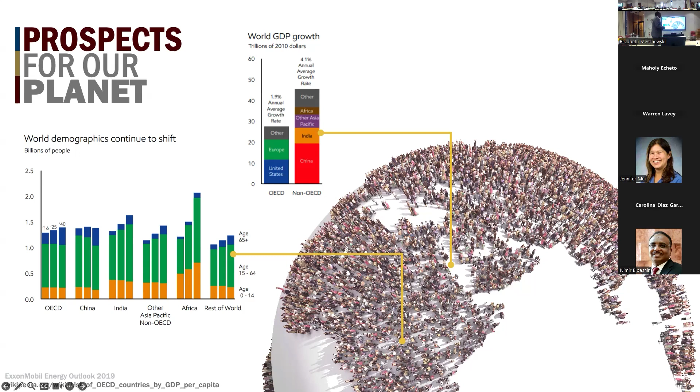The energy requirement of developing nations will be more significant than for developed nations. Therefore, we cannot claim we will survive with what we currently have from energy resources. The energy resources we have are quite limited, and fossil fuel still plays a very critical role in that energy mix.

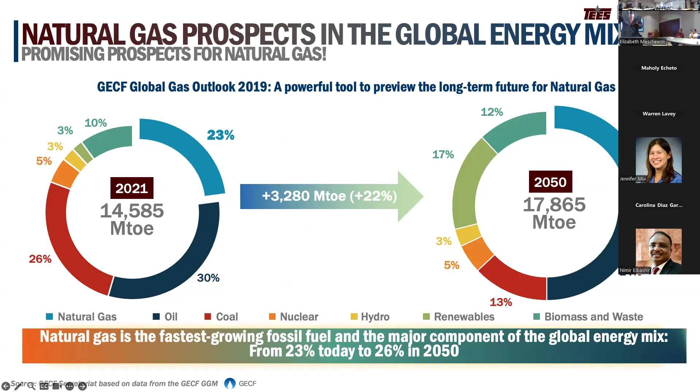All of this is a burden on us dealing with this decarbonization issue. Why is natural gas important? Because natural gas is relatively much cleaner than coal and oil, and at the same time, we've started to learn how to deal with it and how to handle it.

And by the way, starting from COP in Paris, there is general agreement that natural gas is the transition fuel from fossil fuel to the renewable sector of energy.

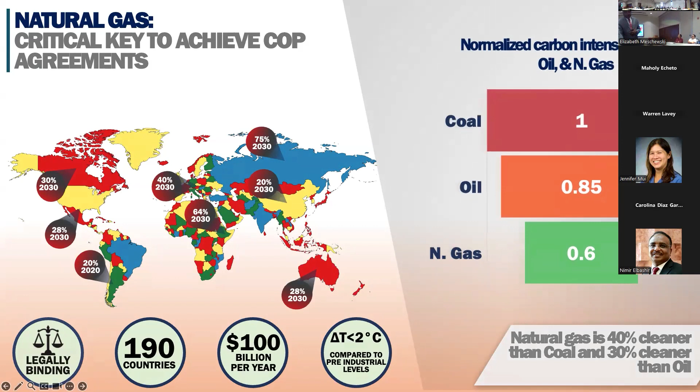So how can we do this? Even though we are seeing improvement in the reduction of emissions coming from coal and from oil, we are seeing to some extent an increase of emissions coming from natural gas, simply because we are using more of it. We are becoming more aware of the emissions coming from fossil fuel, but we need to do much more to handle the current situation. And that requires a major focus.

For the first time in the last COP meeting, which happened in the United Arab Emirates last year, there is such a statement: transition away from fossil fuels in the energy system in a just, orderly, and equitable manner, so that renewable energy sources will take over. But we have to guarantee this. Sadly, I got disconnected, so let's hope for the best.

So, this is where I participated in this conference, along with those from natural gas forum countries as well as different entities. The core focus is how we can do this—is this really achievable or not? Technically, they brought us as an expert working in the natural gas industry. Why is natural gas important? Because the countries controlling natural gas, both in production and in sending it to the world, are a limited number of countries, unlike oil.

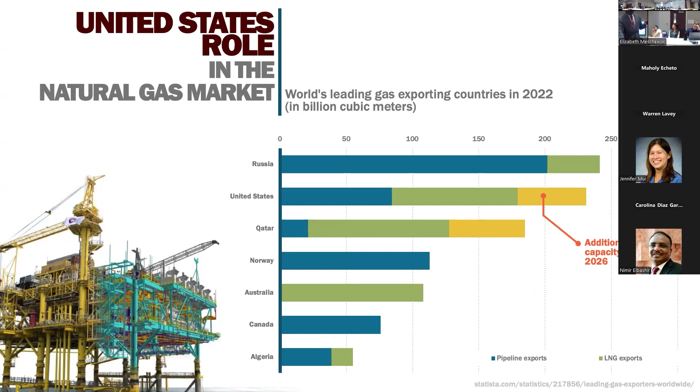You will see why this is important—this is very critical. I've been teaching a course for Texas A&M students since 2015 about natural gas globally and how it's really distributed. I keep telling them that the United States still consumes all of its natural gas internally. The shale gas boom changed the map completely, and now the United States has become a major player in LNG globally—from none in 2016, now they are leading the world.

They have the highest capacity, and by 2026 they are going to have the world's highest LNG capacity. This is where it exists—most of the new plants in terms of liquefaction of natural gas. What does that mean? It means a significant investment in something we call midstream natural gas.

Natural gas is composed of three elements: upstream, midstream, and downstream. Midstream wasn't very significant in the United States because most of the natural gas we have here is used in power generation—we don't need to clean the gas or do anything with it. So we do not have a midstream that produces a significant amount of components we have to deal with, specifically CO2, because now we're going to strip the CO2 and the sulfur so we can produce pure methane for LNG capacity. That's a big deal, and a big opportunity.

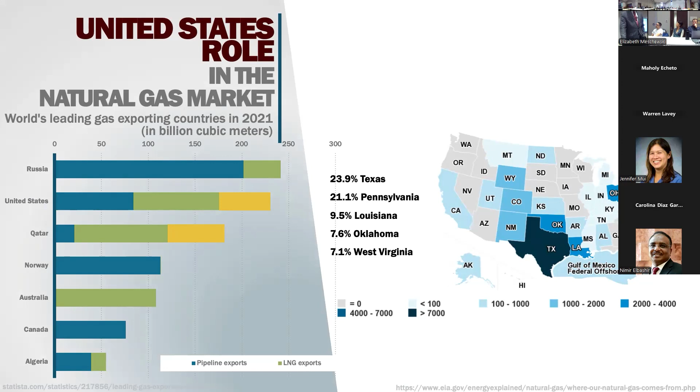The state of Texas is the leader in terms of natural gas capacity, followed by Pennsylvania and West Virginia in the Marcellus field, where the shale gas boom happened. But what does that mean? Now we have to figure out how to do this distribution properly. If we need to decarbonize, we cannot only decarbonize one sector—we cannot say we'll wait until we use that natural gas and decarbonize it then. We have to decarbonize it from the well all the way up to the wheel, ensuring all of those sectors are decarbonized so we can manage this situation.

And that's not an easy deal, by the way. So the transformation to hydrogen becomes the story, becomes the core focus. Natural gas is still the source of 70% or more of United States hydrogen. Steam reforming of methane is still the major source, even though now we are pushing heavily towards green hydrogen. The hydrogen industry is also quite complicated and has to be well integrated from the source all the way up to the utilization sequence of the hydrogen. That's also another opportunity we have to think about, how we integrate all of those together to ensure the decarbonization, even for the green sources, is not an easy target.

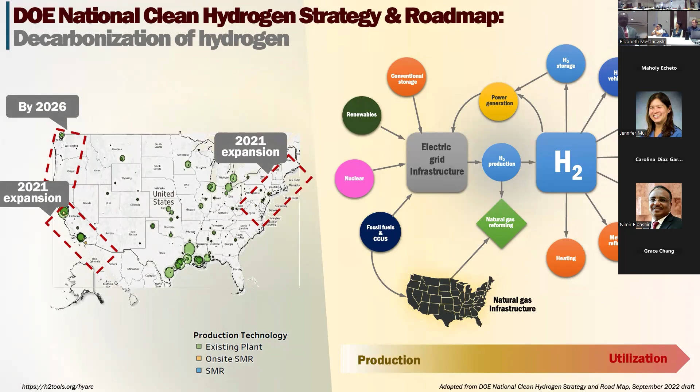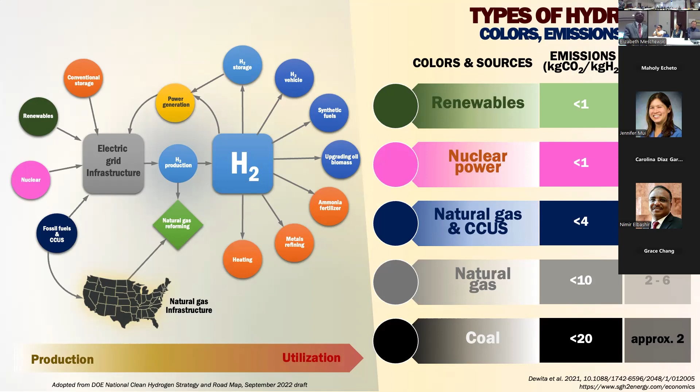So the United States, sadly, is number 2 in terms of the CO2 emitter after China. We all know that. So there is a huge investment from the Department of Energy, and you are very successful in establishing it in order to handle this situation, and this also helps the transformation to hydrogen.

After exactly the shale gas booming, Texas A&M decided to build the Gas and Fuel Research Center. Texas A&M, we were the leader in the area of oil, and our petroleum engineering department is very well known - that's our strength area. Then when the shale gas and shale oil boom came, Texas A&M thought of how we could really capitalize. Meanwhile, we look at the problem from the source until the end of it.

I had the pleasure from 2015, the Board of Regents of Texas A&M built that center and I became the lead of the center, which operates both on our main campus in College Station as well as in Qatar. At that time in Qatar, we built a very unique collaboration model with the industry that also exists in the state of Texas, working in natural gas processing. So we have petroleum engineers, chemical engineers, mechanical engineers, safety, material, chemists - we are a combination of multidisciplinary working to advance natural gas production and processing.

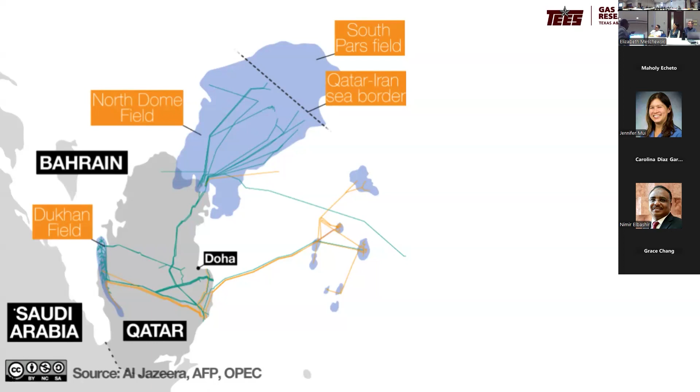This is the state of Qatar. The shaded area outside is non-associated natural gas, which is the same size as Qatar itself. It's not associated - this is the reservoir that Qatar now depends on, and it has become the number 1 leader almost in LNG capacity right now. And also in pipeline infrastructure - you can see the pipeline going to the United Arab Emirates from the overall structure. So Qatar is a peninsula connected only to Saudi Arabia by land.

Okay, so now how do they utilize, how do they monetize their natural gas. They have done it in a form - when I teach my class, I tell them there are 3 properties of natural gas monetization. Property 1, use it locally, like the United States. Property 2, you transport it globally - you have 2 means: pipeline, like Russia with all the network to Europe, or through LNG. With LNG, you make it liquid, reduce it by 1/600 its original volume, and ship it. When you get there, you turn it back to gas. And then the hydrogen. So they have done the 3, but not the hydrogen. In the United States, we have hydrogen as part of the game.

So how do we deal with this problem of decarbonizing the natural gas industry so that the hydrogen will be a hydrogen that's suitable and comparable to green hydrogen.

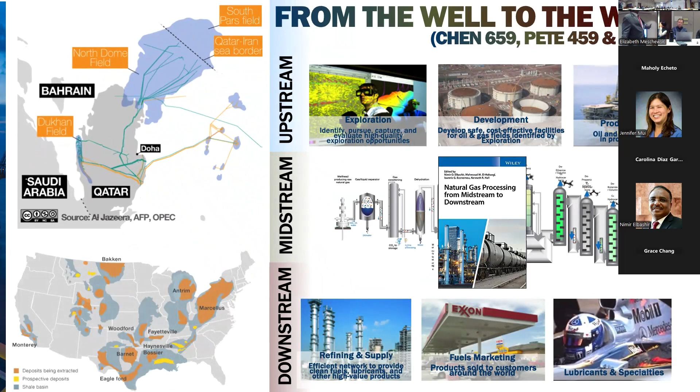And that's the question. So that midstream plant, which wasn't existing in the United States until recently, became the issue. And this is the core focus area of my research team. As a center, we work with the industry, we work with academia.

Now we are coming to a very distinguished center here, exploring opportunities of collaboration. We collaborate globally, by the way, and we work with industry, whether they are existing in Qatar or in Texas or even global-wide. And then we are trying to make an impact in terms of technology development and processes. This is a sample of some of the companies that we are working on. The funding that's come to us is coming from different resources, and this is part of it.

Let us come to the technical talk of the story, the CO2. So the CO2 is our nature. It is existing there, and the nature knows how to deal with it. The nature is handling around 750 gigaton per annum of that CO2, similar to the air, similar to whatever we have around us.

Nevertheless, our utilization of these fossil fuel resources brought this 37 gigaton per annum of CO2, which becomes the whole burden of the global warming, even though it's very small compared to the one that the nature deals with. So now we are struggling to figure out how we capture it, which is the core focus of your team, and for us, how to utilize it, how we put it in the map.

And if we look at the comparison between the two, we will find the following. That's the CO2. We have several options to deal with it. We either eliminate it by trying to find 100% renewable sources that we can deal with, or we will need it, then we have to figure out how to recycle, reuse, to some extent store this amount of material that's composed of the greenhouse gas emissions. And that's the real issue.

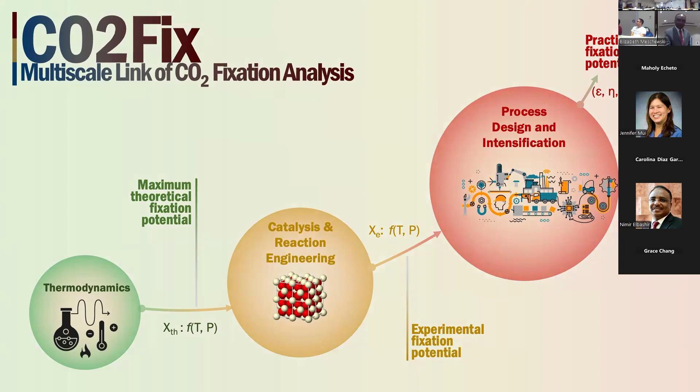So trying to measure this is very sophisticated work, and I have my PhD student who is currently at MIT Energy Initiative, Gasin, who conducted this type of development and assessment, done in collaboration with MIT Energy Initiative. The techniques that he has done are the following: we need to understand the chemistry, and we need to understand the energy requirement in order to do the conversion of the CO2 in the process.

And then we need to understand how we will handle it as the process goes, and finally whether it makes sense economically or not. So it will hit two dimensions in terms of the process. I will very briefly describe it to you.

So if we have a very simple chemical reaction, utilizing CO2 with methanol in order to make carbonates, DMC, whether this chemistry could be considered CO2 utilization or not, that's the question.

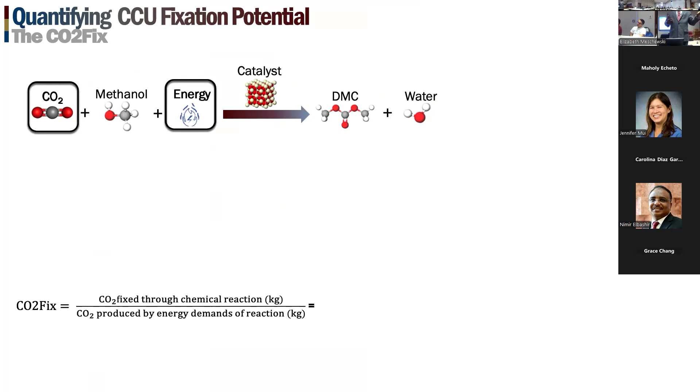So what we're going to do is first define a CO2Fix parameter that we develop. It is actually the CO2 fixed through that chemistry divided by the CO2 produced by the energy requirement during the process. If it is 1, that's total fixation of the CO2, but if it's less than 1 or more than 1, that's the story.

So we're going to look at the chemistry, see how much heat is required for the chemistry, how much conversion we'll be able to achieve, and how much energy is required for this process.

This energy will be coming from the reaction, coming from the heating, and coming from the compression of the process, because those are gases. Then I will account for all of those relevant to the conversion I could achieve in one reaction. And when I look at it, I will get to know exactly whether I am really fixing the CO2 or not.

But we added other parameters to the process. So what are those parameters that we added? We are trying to understand the extent of the energy integration - could we reduce the energy requirement through energy integration or not?

And then whether the efficiency of the process in terms of the energy source could really impact this CO2 fixation or not, and also the energy intensity of the overall process. So we inserted all of those parameters.

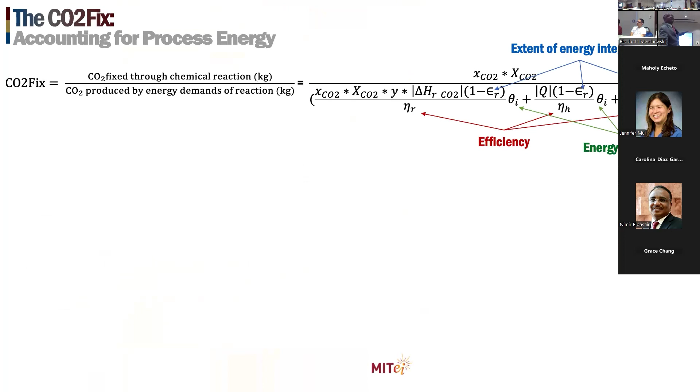And when you see the source of energy, it can show you exactly the diversity. So if I do this chemistry using coal, the story is completely different if I'm doing it using wind. And even wind offshore is different from wind onshore, and so on.

So where you get the energy from is a very critical element of telling you whether you really can save this or not - that the process at the end we develop, in terms of the efficiency and the intensity of the reaction, that could tell us.

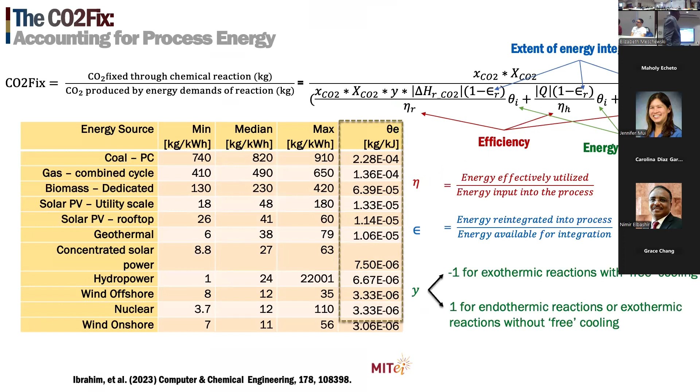And that, as I told you, has been done in collaboration with MIT Energy Initiative. In a typical process, you look for several chemistries, you look for different sources of energy. You show here that all of those based on fossil fuel, you may barely get to fixation if you're so lucky, even if you're using CO2, because you are in this region.

But all of those with renewable, you can get to even higher fixation. So it's an encouragement that even if we want to take CO2 utilization, it's better to take it with renewable energy. And this is quantitative.

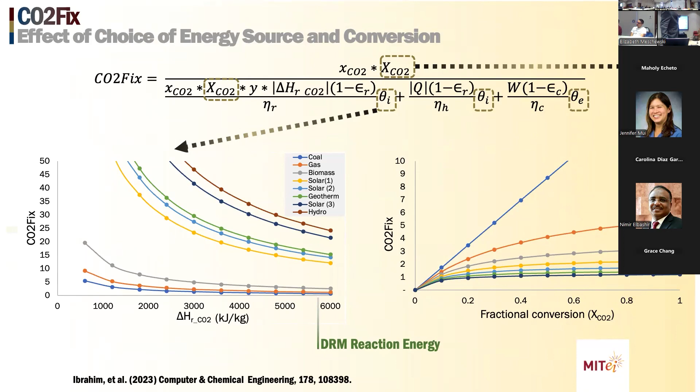And when you look at a conversion like the chemistry of dry reforming of methane - I'll speak about it in the remainder of my talk - this will show you exactly how we could make a difference in the process.

So the process will have two elements: experimental, to understand how the process works, and developing the modeling side in order to account for the potential CO2 fixation of those processes.

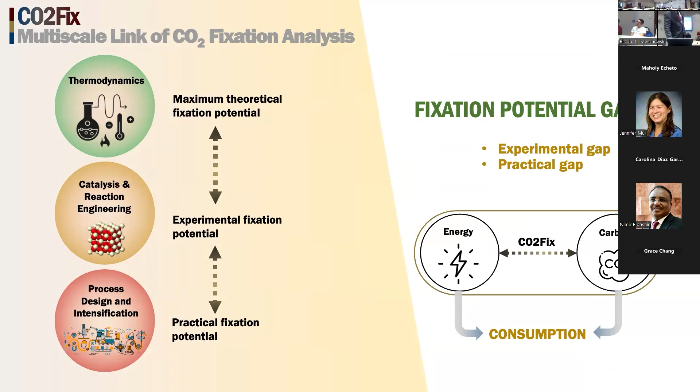So let me take you to one example with natural gas. And that's not a common example, but it will show you exactly how we use our know-how in those areas.

We work in gas processing research in an area called gas-to-liquid technology. In the gas-to-liquid technology, we take natural gas and make liquid hydrocarbons out of it. This is a competing monetization technology with liquefied natural gas, which physically makes the gas, which is methane, into liquid by cooling - mechanical engineers' brilliance. We chemical engineers make gas-to-liquid technology.

We take the gas, we make it syn-crude, similar to crude oil. I guess similar to the area that you're working in. So you're going to see some similarity here.

So this process is composed of 3 stages. The first one, reforming - how we reform natural gas to make something we call syngas, hydrogen and carbon monoxide. This reforming is the same process that makes hydrogen, which is steam reforming, but it could be other reforming.

We take it to a chemistry called Fischer-Tropsch, developed by German scientists in the 1920s, and we produce syn-crude. This syn-crude is white compared to crude oil but has the same hydrocarbons. We refine it and produce a final product.

If we look at the flow chart of the process, this is how it looks. It's composed of three elements.

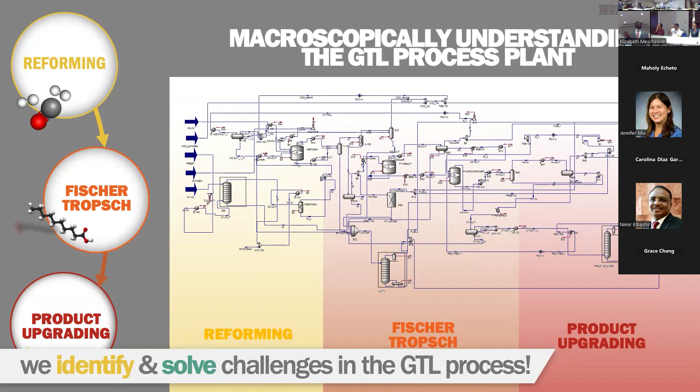So how can we deal with this process? My research team works on three pillars, and that's where we learn how to decarbonize the process. This decarbonization is very critical because the future refinery globally will be key. The reforming, refining plants and chemicals industry built on crude oil will not exist by 2050 - it has to be transformed to biomass as a feedstock, or to CO2 as a feedstock, or other waste.

I guess you are working in all of them - you have a very strong contribution. That's what I followed today and enjoyed listening to, the biomass work and how you process it to fuel. You're also working on plastic waste and how it goes through pyrolysis, and then capturing the CO2. So this is the complementary part of how you build that network that will transform the industry.

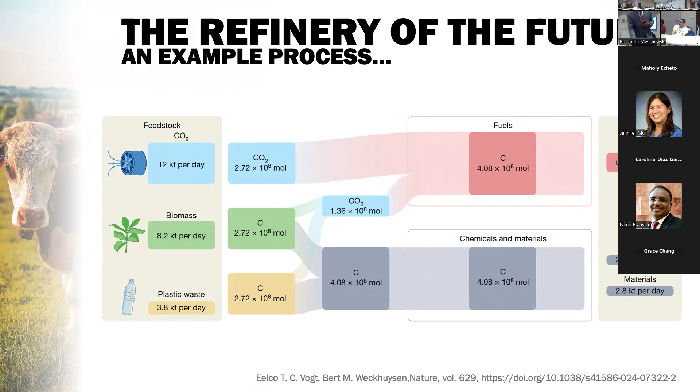This is the Nature paper, actually from a group in the UK. The Department of Energy considered it the starting point for any work to design the future refinery plant - it has to start from here. They were not going to accept anything that takes crude oil or gas. Here we are trying to see how we could really be relevant and meet all those standards that will be part of this story.

You can see that different refineries will take different products, and I'll tell you the story from the end - the fuels that we make. I'll show you exactly how we work in this area. The final fuels are an interesting project - we worked with Shell, Rolls-Royce, and Airbus to design synthetic paraffinic kerosene coming from natural gas through gas-to-liquid technology, to replace crude oil derived kerosene or jet A1. This was a very interesting consortium.

I have the fuel characterization lab, and my research team works heavily on a unique set of characterizations to understand all the properties associated with fuel design, and how different fuels and fuel blends relate to hydrocarbon structure. Certification of each fuel requires certain properties - when you meet those properties, ASTM will tell you if you can call your fuel aviation fuel, or diesel fuel, or not. We work very closely with industry and have an ISO certified lab. That means industry uses us, and I get a lot of funding from it. That's how I hire a lot of students to work with me, and it helps in many of the operations. I'll show you a unique example from the aviation industry.

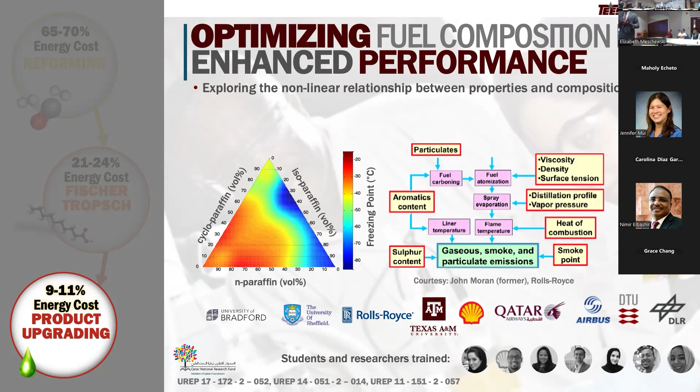Meeting all of the properties is a big deal for those types of fuels, and that's an interesting area we work heavily on. We also work heavily with GE and others, and besides Shell, in aviation fuel and diesel fuel.

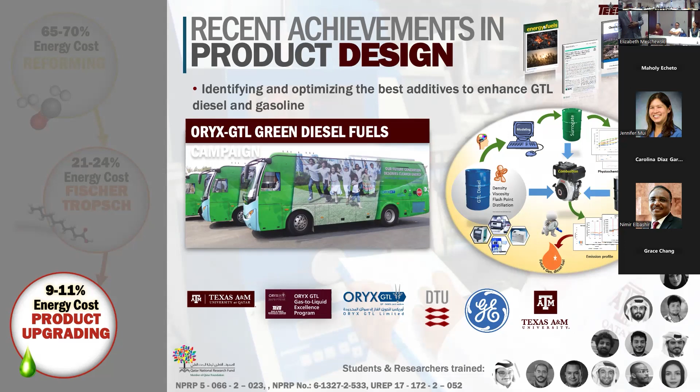Understanding those types of fuels and trying to insert them into the industry and certify them is a very big deal. The consortium with Qatar Airways allows us to support Shell and others in order to certify something we call ASTM D7566. That means a mix between jet fuel coming from crude oil and fuel coming from GTL, SPK, 50/50, that can be used in the airplane. The certification of fuel in the aviation industry is very complicated, unlike our cars — because with cars, we can stop and take an Uber, right? But in an airplane, if you have a problem, it's going to be a big deal for the certification of the fuel.

We also work heavily on catalysis in order to understand how those processes work. We design our own reactor systems and scale them up, starting from lab scale, going to bench scale for many of them — that's a typical bench scale for the Fischer-Tropsch process.

For the Fischer-Tropsch process, we work with Cambridge, with Open University, with Virginia Commonwealth, but we also work heavily with industry to help them see how they can control the selectivity of the products coming out of this reaction. This is a polymerization reaction — you start with a building block, another one comes, and so on. But if you're only interested in gasoline, what are you going to get, and how can you control the process?

We've done a lot of hefty work designing those catalytic processes, and we advance them — particularly the one related to CO2, the most energy-intensive process I referred to, which is reforming. This happens at 1000 degrees Celsius and above. In Shell's plant in Qatar, the Pearl GTL plant, it's 1300 degrees Celsius where they do the reforming process — see how intensive that is?

So we told them we can advance a reaction called dry reforming of methane. Rather than reforming by steam or reforming by oxygen, partial oxidation, we will help you commercialize reforming by CO2. Good deal? That's what we promised them.

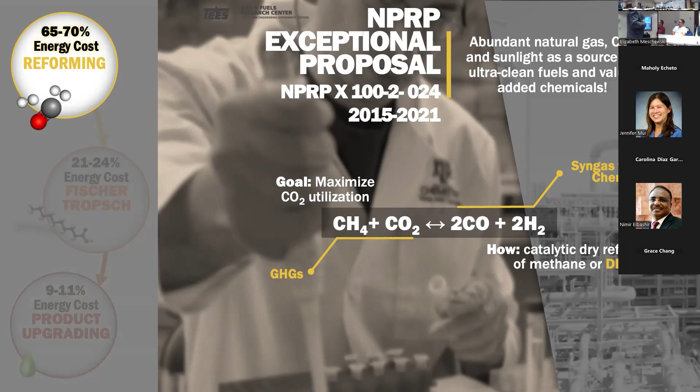Then we need to prove that this process is a CO2 fixation process — otherwise it has no meaning, and it's just energy. This process is actually very unique. It has existed for a long while, but no one was able to commercialize it, unlike other reforming processes.

So I led this consortium for 6 years. It's around a $6 million consortium, $5 million coming from the Qatar National Research Fund, besides $1 million coming from different sources, with Total Energies, Total Belgium in Feluy where the petrochemicals are, as well as Total Qatar, and then with Northwestern University. There, we worked with the chemistry department — Professor Tobin Marks, Peter Stair, and Eric Weitz.

And with my colleagues on the systems engineering side, we tried to solve the problem related to dry reforming. The problem is as follows.

For the reforming, we have two core carbon sources, CO2 and methane. Carbon deposition is very likely. The reaction is even more endothermic than steam reforming of methane, meaning we're going to need more energy. And if I get this energy from burning fossil fuel, I will never get to CO2 fixation. The very bad thing is that I'm going to have a deficiency in hydrogen — the hydrogen to carbon monoxide ratio, the best I could theoretically achieve is 1:1, while in the downstream process, the least I need is 2:1. That means I need to solve this.

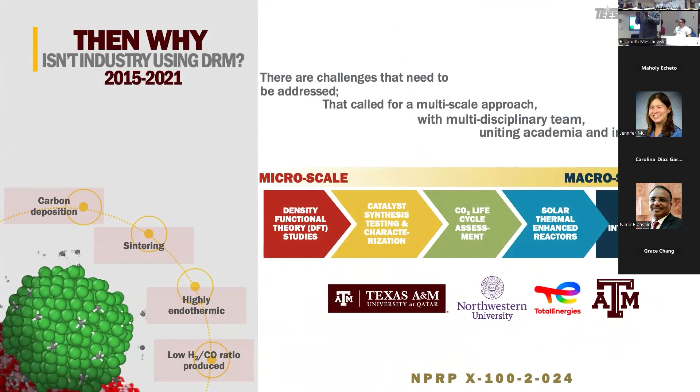So what we promised them is that we would solve all of those problems, addressing those issues from the micro scale all the way up to the macro scale. We go to the core of the chemistry, look at the process, and integrate all of it together. And we came up with solutions at the end of those 6 years — solutions that address the problems we started with.

With Northwestern University, they worked on designing a very unique catalytic process protected by atomic layer deposition, building a layer of amorphous alumina on the active site so that it's not contaminated by coke, which would kill it. My research team designed a system of nickel cobalt catalysts. The most important part is how the reactors work, so we designed a series of novel reactor processes.

Those novel reactor processes will then help to address the remaining problems, the endothermicity and even the deficiency of the hydrogen and carbon monoxide ratio. I will focus for the sake of time on only one of them.

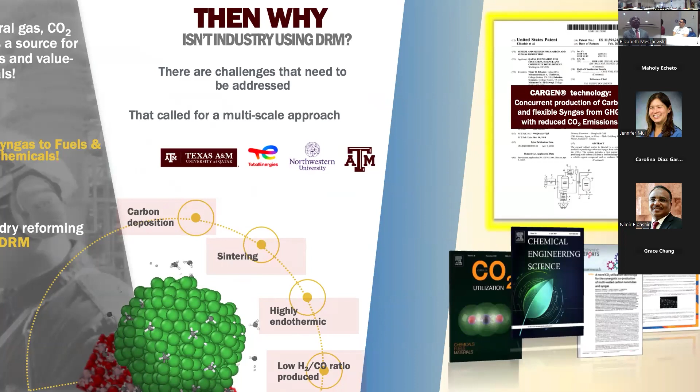This has been a very successful consortium. We have more than 30 journal papers, more than 6 PhD students graduated, 20 masters, and so on from different universities and institutions. The uniqueness of the patented technology for the CARGEN is the most important element. This is a model where students have an exposure of going to Evanston, fellowing in Belgium, working and getting that type of exposure of collaboration in big groups. It has been a very unique type of work done in an integrated way.

This CARGEN process, or carbon generator reactor, is a collaboration we started right now with a DOE proposal. We hope it will be successful and will take us to move forward. Let me explain it to you.

The process started with an idea from this student, who later was my PhD student. I just a couple of days ago had lunch with him in Chicago. He is now in Honeywell.

And this guy came up with this brilliant idea. In the project, we are trying to avoid carbon formation, which is one of the major killers of the catalyst. He said, let us make carbon in one reactor and make the reforming in the second reactor. It was just whatever idea, and what we end up with is a technology of 2 reactors.

The energy requirement of it is almost half the energy requirement of the dry reforming of methane, close to what we want. The CO2 conversion, because of those 2 setups, can go above, well above 65%. Then we will never be limited by the 1:1 ratio. We can go in the second reactor to whatever hydrogen to carbon monoxide ratio.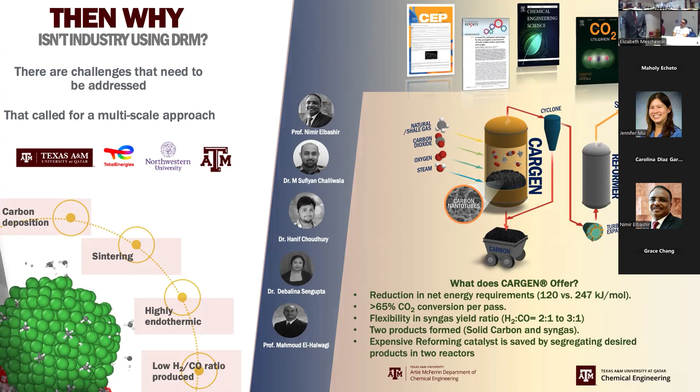So this CARGEN technology - I will show you exactly how it developed from the inception until the scalability level of this technology in terms of a process.

The concept again came from this student, and I asked him with my colleague, Professor El-Halwagi, in process systems engineering, to do thermodynamic calculations to see exactly what the energy requirement is for this process. At the lowest energy, we formulate the most amount of carbon. Therefore, in dry reforming, we do it at a very high temperature to avoid carbon formation. So we go in this range where there is no carbon formation, and the catalyst can survive.

But in this range, we burn a lot of fuel, and the CO2 emission is the highest. So we pay one cost for another cost. So he did it at the autothermal point almost, and produced the most carbon.

Then we came and said, let us do it experimentally, let us go and see whether this is really real and what type of carbon. We never intended to produce carbon nanotube - this was not the intention. The intention was to get whatever carbon material and get rid of it as a solid carbon.

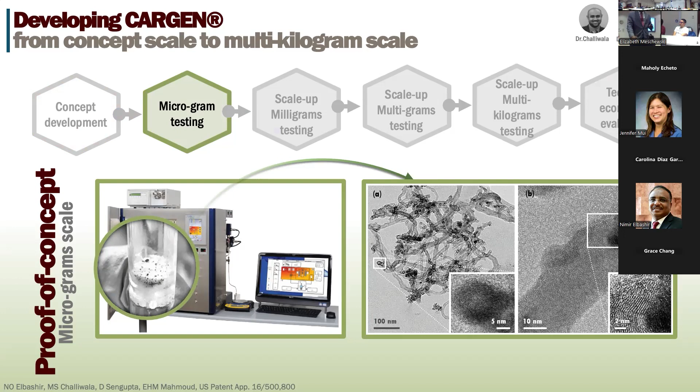So what we noticed when we did it at the micro level, in my small type of reactor, was that the carbon was multi-wall carbon nanotube, at the microgram level. Then we started getting curious - is that real or is there something wrong? Then I asked them to scale up the reactor and scale up the process.

So Dr. Sufyan and Dr. Hanif, who's a postdoc working in my team as well, moved now to the TGA. In the TGA process, they did it at the milligram level. We found that we can still control it to form multi-wall carbon nanotube, and it's a tip growth mechanism where the catalysts behave like this in the process.

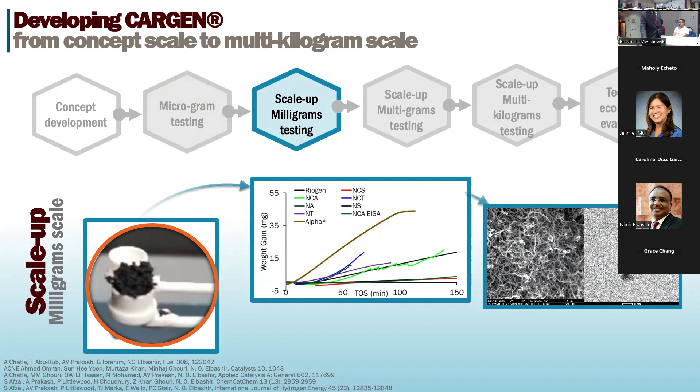Then we changed our strategy in the catalyst. At the beginning of the project, we were trying to use catalysts to avoid carbon formation, but now we are aiming towards carbon. So we have to switch the strategy to make catalysts that produce the most carbon in the process - and that's also part of the discovery of the process. Now we proved it in the milligram scale, so we said let us see it in grams and hundreds of grams.

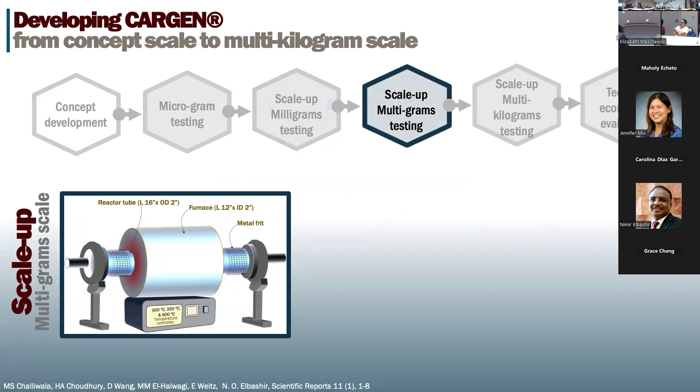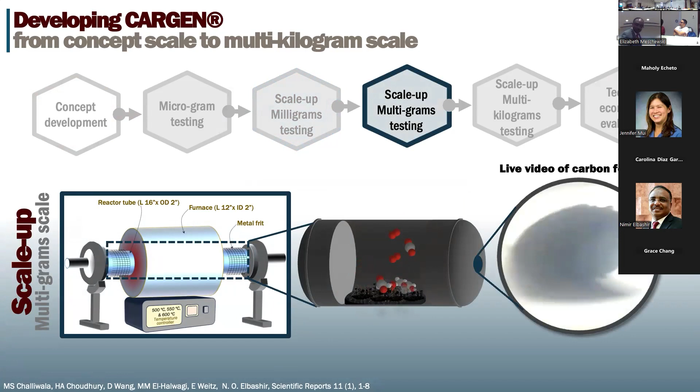Then they design a chemical vapor deposition system, which is a different regime of interaction, and we run the reaction. If you see, the process will accumulate the catalyst, and then we will make carbon nanotube out of this process. It will be very clear over here.

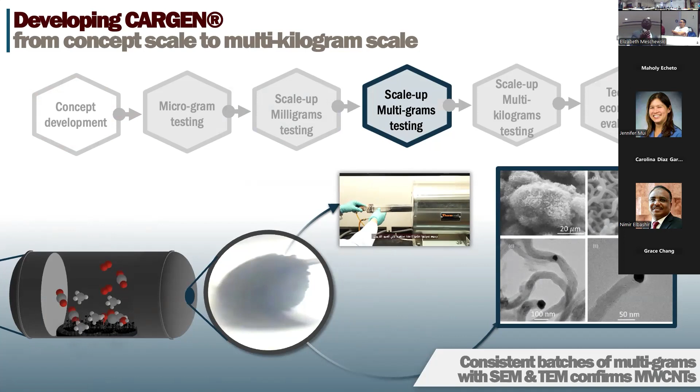And if you look over here, you're going to see Dr. Hanif pulling out this tube full of carbon, which started with the catalyst and carbon nanotube, and it's still multi-wall carbon nanotube. Then we start playing with the protocol on how to ensure the quality of the carbon nanotube, depending on the protocol of the process.

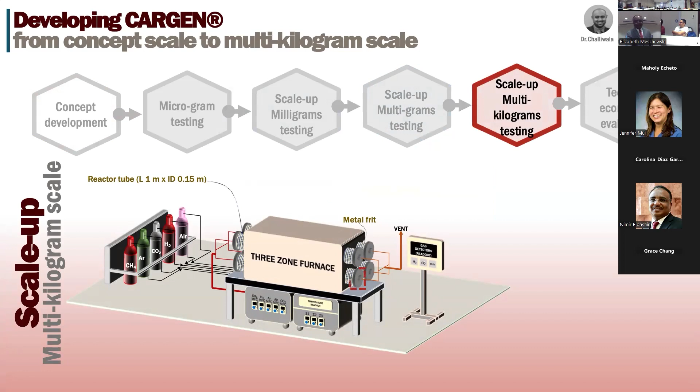So we started looking at whether we can make it at kilogram level, which is what we observe at the microgram level. So at the kilogram level, we design a larger system of a similar process, and that's carbon nanotube in terms of kilograms inside those tubes.

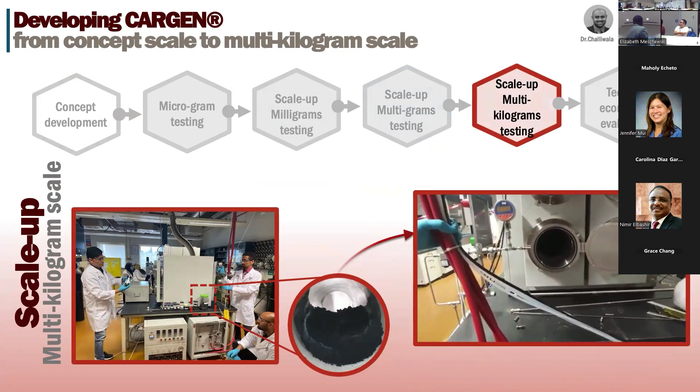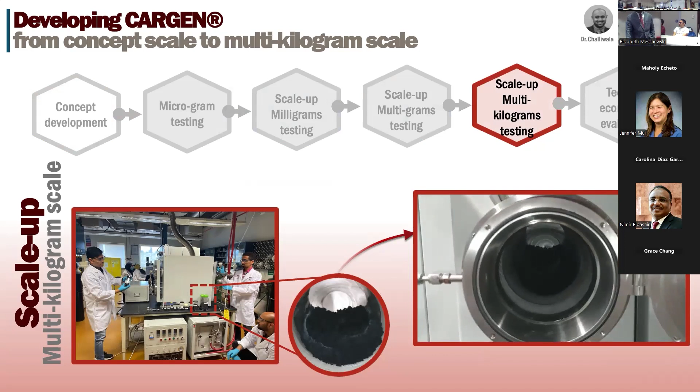So when you look at it, actually this is a scientist, the postdoc and the PhD student, pulling the tubes out, and this is full of carbon nanotube. That's a kilogram-level demonstration of the process in the chemical vapor deposition process, and still it's a multi-wall carbon nanotube of high quality, not from us. All the third parties who want to collaborate with us took it.

So what does that mean? Let me take you back again to the decarbonization story and to the natural gas process itself. This means the following: for example, in Qatar, and I was talking to Kevin earlier, they have a very unique structure of infrastructure. Most of the gas processing plants are in an industrial city.

And the midstream, because they are producing LNG and GTL, they have to strip everything down until the methane. The midstream is the largest existing. They have so many trains in one place. Per day, roughly, they can emit 10,000 tons of CO2, and semi-pure CO2, because this came from the sweetening process. In the sweetening process, they have sour gas, and we remove sulfur and we remove the CO2.

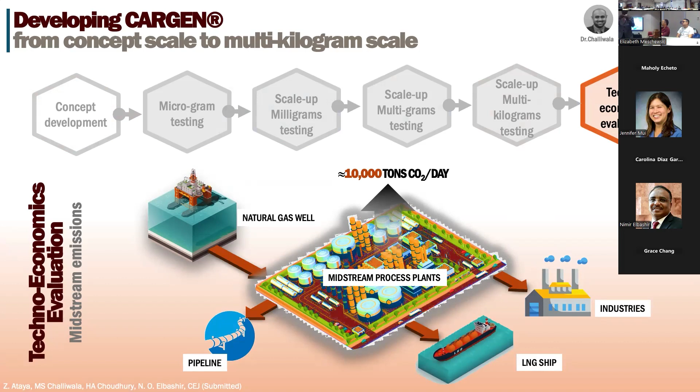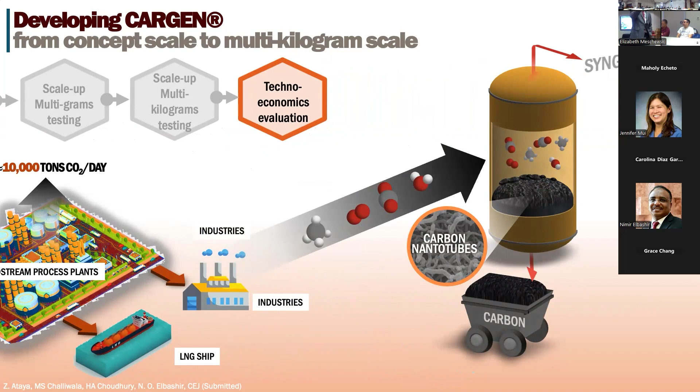So here, how could we really, by similar technology like this one, bring the midstream plant to the downstream side of the story? This CO2, which impacts the carbon intensity of whatever product they sell, we can take it now and bring it to the downstream side to produce two things: syngas and carbon nanotube. And it will be a full sequestration of the CO2 if we do it properly.

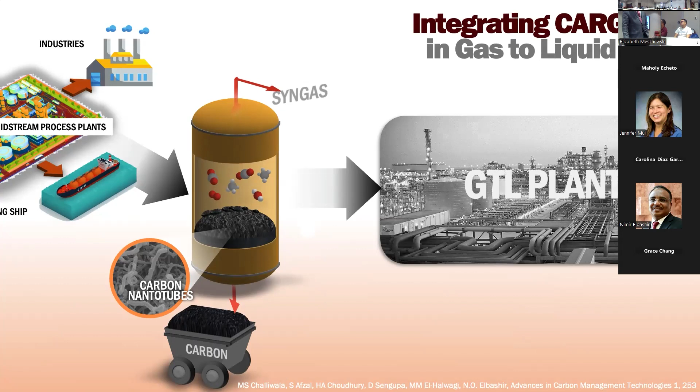So we look at gas-to-liquid technology, which Shell has as the world's largest existing GTL plant in Qatar. Sasol has another one, also a smaller plant than Shell's. So what's the story here?

The story here is that this carbon nanotube has to be utilized, am I right? And if we start producing a large quantity of it, we have to find a utilization. Someone has to use it. And carbon nanotube already exists, but it is expensive to make.

And the cost, by the way, is around here, the cheapest one is around $100 or so per kilogram of carbon nanotube. If you go to single-wall, it can go to $10,000, even beyond that scale. And therefore its utilization is limited. But now with this process, we can bring it to a very large scale where it can get to less than $10 per kilogram. That will open up significant applications for this carbon nanotube, and that's going to be the sink for the carbon material produced in this process.

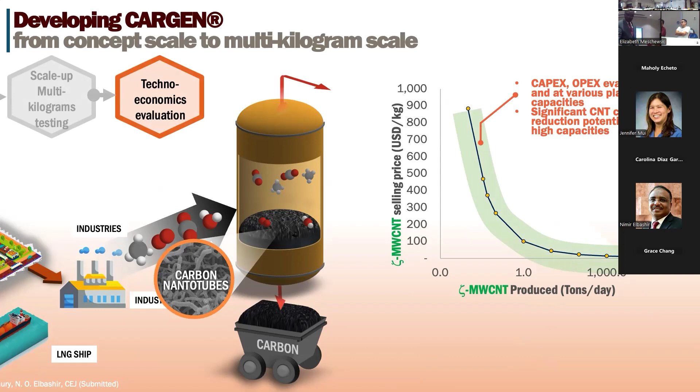So this is the core focus of my research team: how to develop the technology to the scalability level, and then how to build the collaboration with the utilizer of this carbon material to be part of the process.

You remember the color coding earlier? Now I will show you a very interesting hypothesis that's going to be a good story to come as part of this. So we said we have two products: syngas, which is hydrogen and carbon monoxide. So we have hydrogen here as a product of this CARGEN process.

So what's unique about this hydrogen? This is the coal we talked about earlier. This is the steam reforming of methane from natural gas. This is blue hydrogen if I capture and sequester the CO2, but still we're going to have emissions. This is renewable, and this is nuclear, almost zero. It's not zero, there's nothing called zero. The material and the process itself is going to be an emitter, but everything is relative.

Our technology, this way, using the CO2 to make this hydrogen from the methane, it could be negative carbon hydrogen.

Okay, and by the way, we have done it. All the quantification process following our concept in the CO2 fix. If we look at this boundary compared for steam reforming of methane and blue hydrogen and coal, this is negative carbon hydrogen.

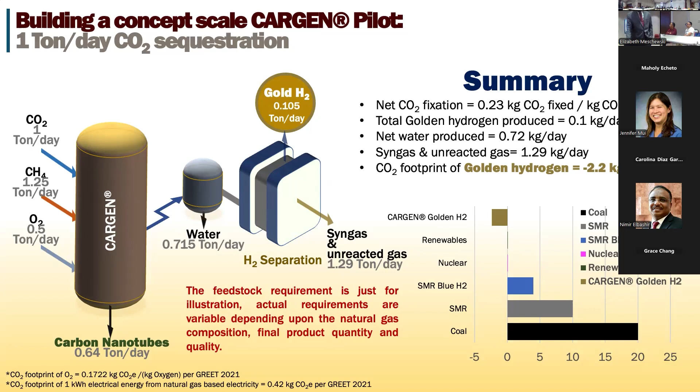That's another marketing value besides the marketing value of the carbon nanotube. And the carbon nanotube is actually a big deal, by the way, because it's a big process. So how we can maximize this hydrogen? And this hydrogen is a big deal.

So we need to develop a systematic catalytic process for the second part of the reactor. So I have two reactors: the CARGEN, and the conventional dry reforming of methane. We have done a lot of work developing those catalytic systems so that even in the second reactor, we protect the catalyst from coke deposition. And that's a patented catalytic system.

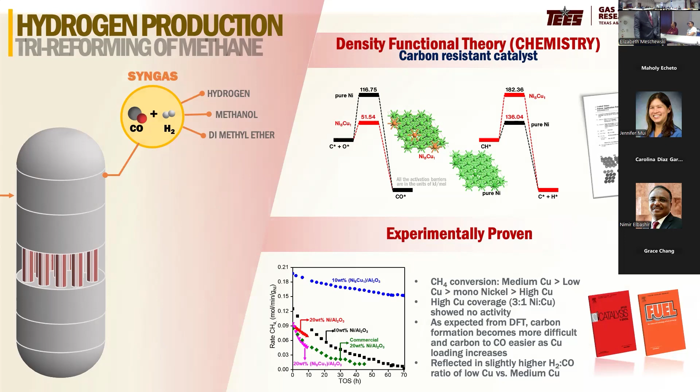Then to scale it up, we need to understand the kinetics. Now our reaction in the CARGEN covers all the reforming technologies. It has the steam reforming—because we have a little amount of oxygen, we have the partial oxidation. The steam, because water is a byproduct of the CARGEN process. And then we have the dry reforming, which is the CO2. And then we have the coke formation over here. So we have all of those reactions.

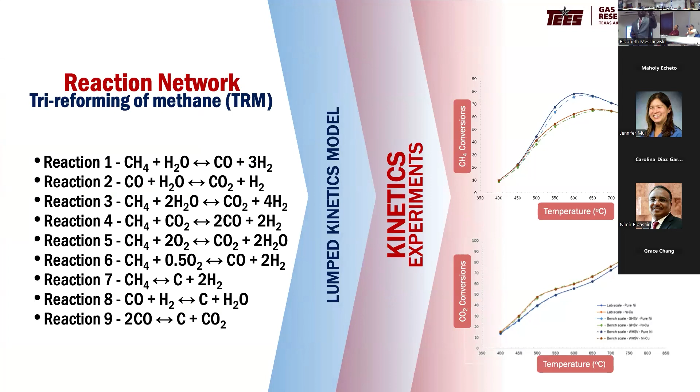To capture what is really happening, we need to measure all of those reactions and validate their significance. And by the way, when we capture them, it really matches exactly what we observed experimentally—even the amount of carbon that we measure at the end of the process. That means the model is working. What does that mean? It means we can use it to scale up the technology even further when we go to the tons level of the process.

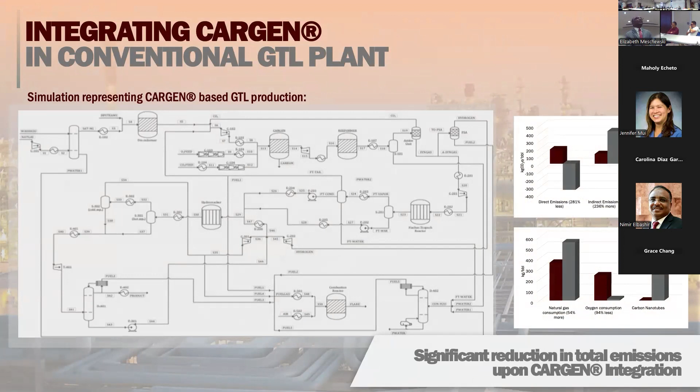Okay, so here we need to move forward. We have looked at it in the existing infrastructure to produce something relevant to sustainable aviation fuel, and to compare it even with natural gas. And then we look at it in the ammonia process. I will not bother you with all of those details, but we showed exactly how much we reduce in terms of emissions, and what this impacts on the carbon intensity of the final product we produce.

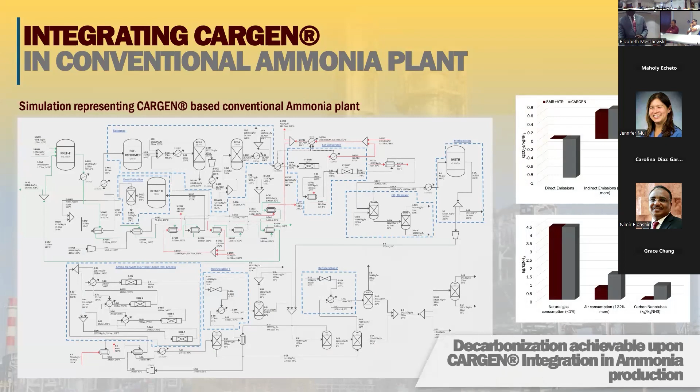Finally, what is this material of carbon nanotube we produce, and what difference does it have from the one in the market? So this is our material that we produce all the way up to the kilogram, and this is what exists in the market. We have a larger diameter, and we have a longer carbon nanotube than them, but we do not have the same purity. Their purity is better.

Why? Because we still have the catalyst inside our carbon nanotube. And that depends on the end stream application. If you need it for battery, we need to get to this purity or higher. And therefore, my team developed a recipe of recovering the catalyst particles out, meanwhile keeping the carbon nanotube intact, so that we can get to higher purity out of the process.

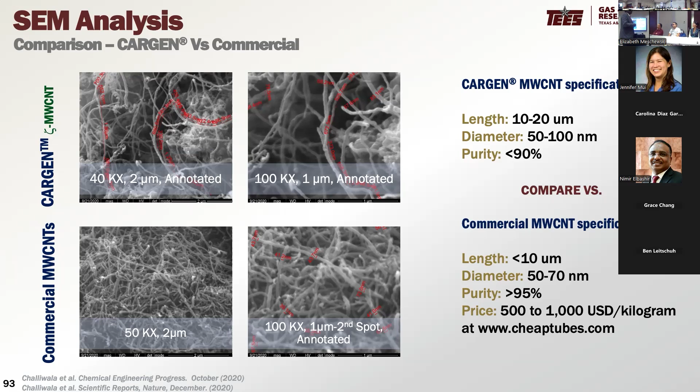But nevertheless, now it's going to be more expensive. It will not be the same cost that you earlier have seen with the process, but every process is going to have its needs. So I'll just show you the details.

Second one, we are producing syngas—only the pyrolysis process produces hydrogen, but the others do not produce syngas. And pyrolysis only produces hydrogen, not syngas. So we can be integrated into processes using syngas, but not the pyrolysis.

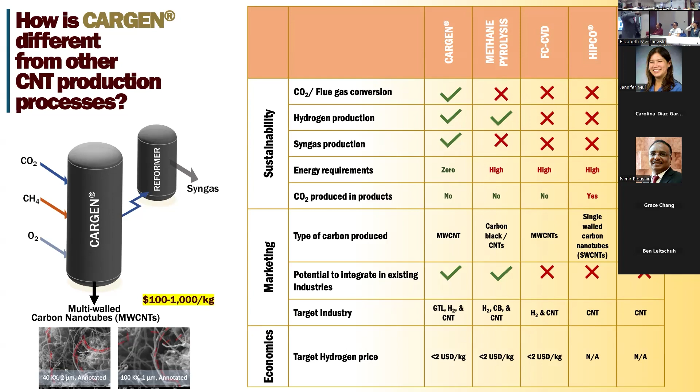Okay, so then we have the energy requirement. If we do it around this autothermal approach, we're close to zero, and so on. That's a lot of advantage in terms of how we can deal with it. But our carbon nanotube is a green carbon nanotube, and our hydrogen is even greener than green hydrogen. And therefore, we made this artificial color code—we call it gold, even though other people have a different classification of gold hydrogen in the process.

So where is this carbon nanotube going to go? What market will it be utilized in?

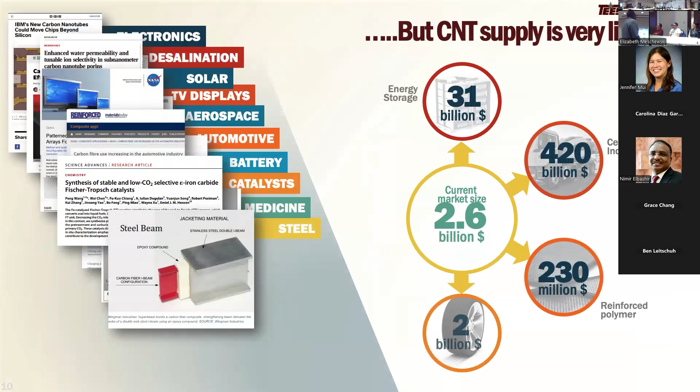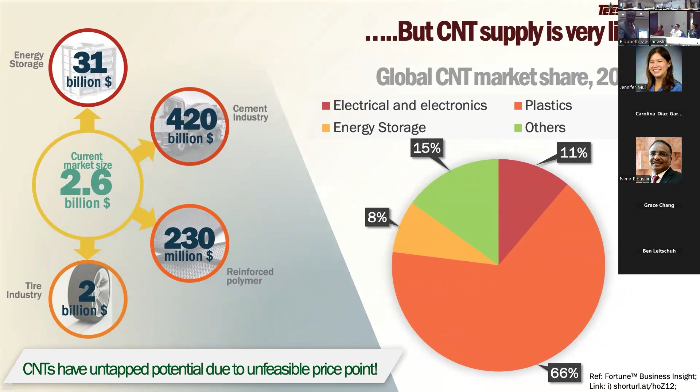These are the significant existing markets for carbon nanotube, and we tested some of them. We have gone very deep in the entire industry process. The major producer of carbon nanotube globally is in electronics, and LG is the major producer. Remember the Monolith company that the Department of Energy loaned $1 billion to in order to move the pyrolysis process.

And the statement from Goodyear: they said that as the only US headquartered tire manufacturer, it is especially rewarding to be a connection point for significant US innovation with Monolith, and they were partnering with them. This is the letter we received from Goodyear in 2021. They are the ones who called our carbon nanotube 'green carbon nanotube.'

They use it through a company in Austin called Molecular Rebar Design. They blend it and give it to Goodyear. Goodyear issued a certificate saying they think Texas A&M technology is the most suitable for the green and electric vehicles they would like to use in the future, and they said they're very interested in working with us on R&D to develop this material to be part of the rubber industry.

So what is next? As academia, we've reached our limit. The commercialization now has to go to the tons level, and even different reactor technology is needed. I presented you several reactors from the micro scale all the way up to kilogram scale. Each one is a different reactor technology. I'm not going to say what it is. We are working on the second level of those reactor technologies.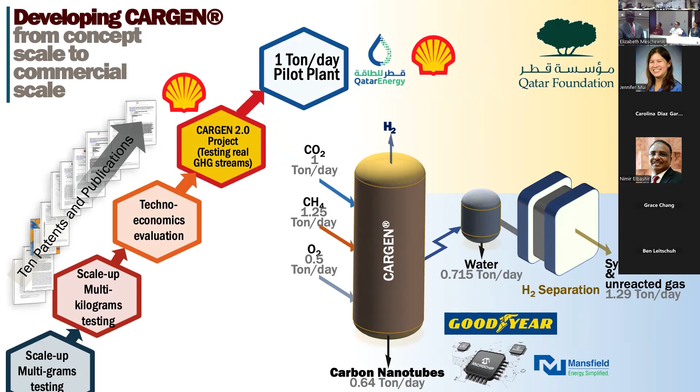But the interest in the industry side goes beyond different groups looking at it in different ways, even the microchips industry in terms of utilization. Finally, I'm going to tell you this is not only the story.

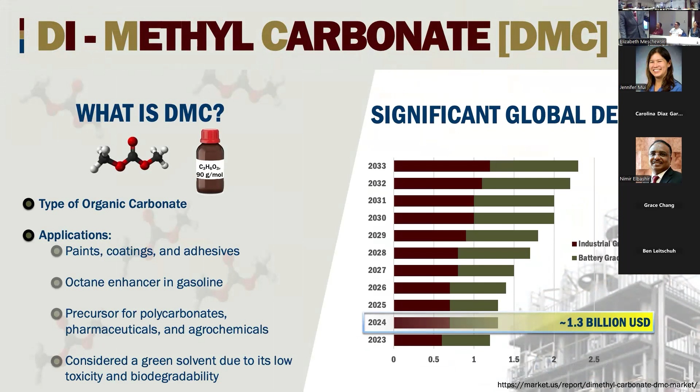We work with industry very closely to develop this CO2 utilization. You remember that DMC, which is a simple chemistry. I'm not going to burden you with all of these details. I will take you to something conclusive. So what we are trying to do is really make it a CO2 utilization technology and overcome the burden of commercialization.

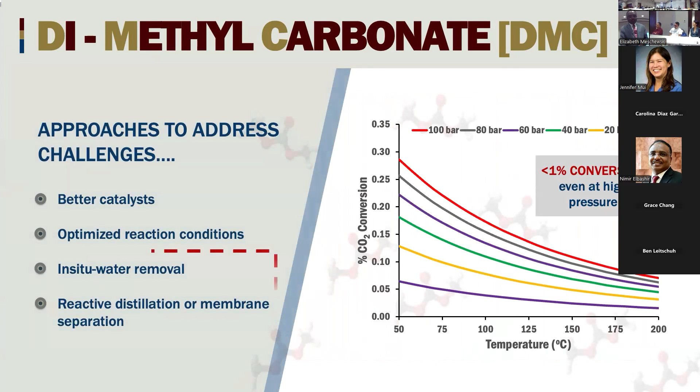Here we are using CO2 and methanol to produce a very important precursor of the process. My team worked on this with Shell for a long while, and what we reached was something very unique. The process is a reversible type of reaction governed by equilibrium. This is the problem: the yield is very low because it goes back again, but it is a CO2 utilization process.

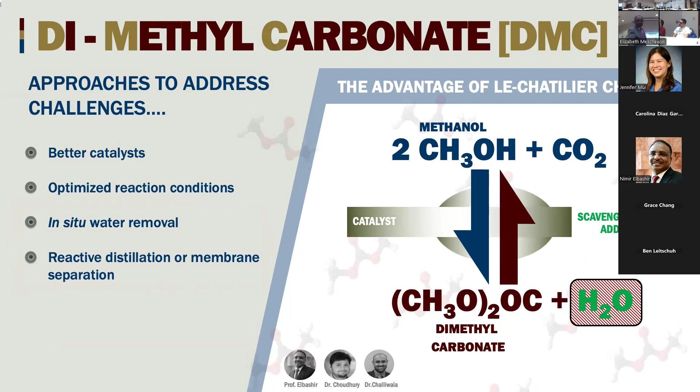We developed jointly with Shell a process for how to handle it, to make it irreversible so we can increase the yield by scavenging the water. That's another level of collaboration with industry to scale up this technology to a higher level. Now we have a patent in this cycle that's been approved, and the technology is now at the pilot scale level of operation, a joint project with Shell, actually led by Shell in that work.

As a team, my research team needs to educate the industry on how to use our technology. Our technology is not one design, not one setup. If you need it only to produce carbon nanotube, that's completely different from if you need to integrate it within a gas processing plant or a chemical plant. Each plant has its own feature; it depends on the feed gas coming to it, and on the product gas and the quality of product gas you need.

So as a startup, we are working with those companies, and the startup has a number of my researchers, which is our unique group—only the small group that's in Qatar.